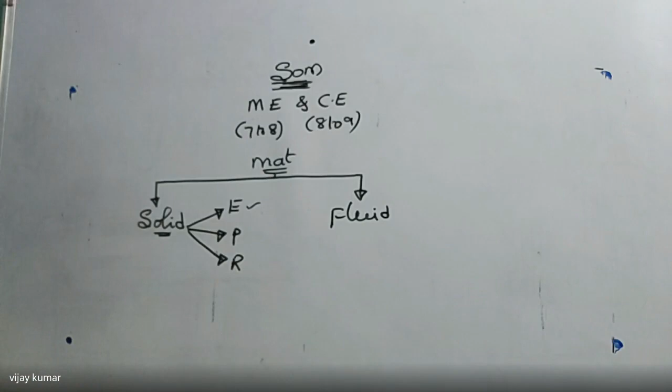In case of elastic material, all of you know the definition very well. What forces act on the material I'll give you later. If you apply any type of force, the material undergoes some expansion or deformation or change in shape or change in dimension. If you remove the external force, the body regains its original dimension or original shape. Such materials are named elastic materials. Most of the students will know this very well.

What is plastic material? If you remove the external force, the body does not regain its original dimensions or original position. Such material is named plastic material. Now, what is a rigid material? If you apply any type of force, the body does not have any change in shape, so there is no change in dimension of the material. Such material is named rigid material.

These are the materials we use in strength of material, but here we are going to learn only two variables. Listen carefully. The first one is sigma and the second one is epsilon. Sigma is nothing but stress and epsilon is nothing but strain. In the entire strength of material, we are going to learn the value of stress, whether it is maximum or minimum.

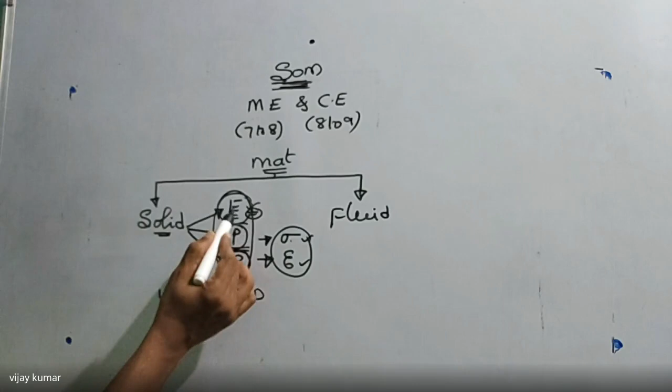So if it follows Hooke's law, then we can write the relation between stress and strain, whether it is one-dimensional, two-dimensional, or three-dimensional state of stress. Now, these are the materials we are using in our strength of material. Now, what are the forces which are acting on these materials? Listen carefully. Those are very, very important here. How many variables we have to calculate here? Two variables. One is stress and one is strain value.

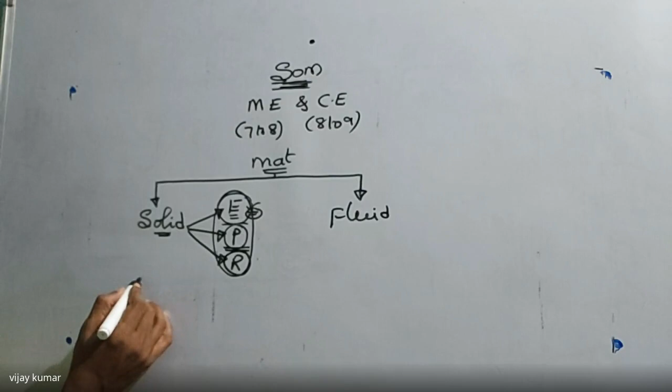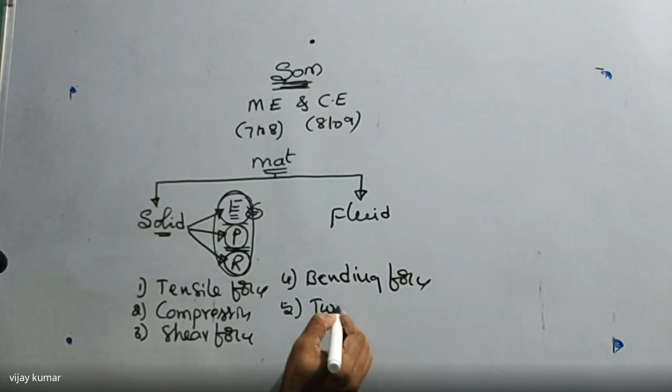And here, what are the forces acting on these materials? First one is nothing but tensile force, the second one is named as compressive force, third one is named as shear force, the fourth one is named as bending force, and fifth one is named as twisting force. So these are the forces which are going to act on different types of materials.

What are the materials here? Elastic, plastic, rigid materials. But which material are we using most in the engineering field? Elastic material. Why? Because it follows Hooke's law. Then we can write the relation between the stress and strain. Listen carefully. These are the forces we are going to apply on any type of material. When the material is said to be deformed, then we can find what is the value of strain. After that, we are going to find what is the value of stress.

Now, in case of fluid here, what are the values we are going to find? Only three variables. Listen carefully here. First one is nothing but pressure, and the second one is nothing but velocity, and third one is nothing but force. What is force? Force is nothing but M into A. What is acceleration? Acceleration is nothing but change in velocity with respect to time.

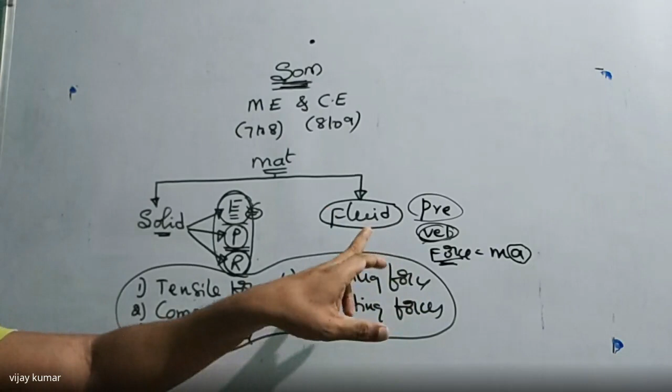If you know the pressure, I can find the velocity. If you know the velocity, I can find the acceleration. If you know the acceleration, I can find the force. If you know the force, I can find the work. If you know the work, I can find the power. If you know the power, I can find the efficiency. So this is the sequence of operation of different types of variables in our fluid mechanics. But in case of fluid mechanics, we are going to calculate only three variables: pressure, velocity, and force.

But in case of solids, we are calculating only two values. I already told you, that is sigma and epsilon, that is stress and strain, under tensile, under compressive, under shear, under bending, under twisting. Whatever the force you take on the material, we are going to calculate tensile stress, compressive stress, shear stress, bending stress, twisting. That is also named as torsional shear stress.

Got my point? So these are the different types of materials we are going to use from a civil and mechanical point of view. These are the types of forces which are acting on the materials. So now I'm going to give it to you here: what is the meaning of strength of material? That is the basic thing we are going to learn here. So listen carefully here. So first of all, I'm going to give you one thing.

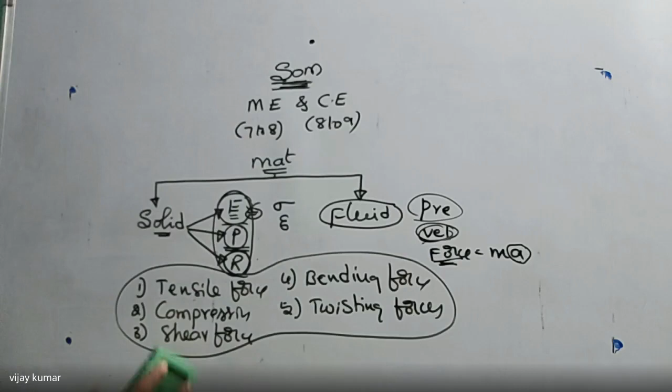Listen carefully. Depending on the forces, I'm going to divide the entire strength of materials into chapters. So listen carefully what I am saying now. Depending on these forces, the entire strength of materials is going to be divided into a number of chapters. So what are the chapters we have in our strength of materials? I'm going to give them to you, and after that, I'm going to tell you how many marks each chapter contains from the GATE point of view also.

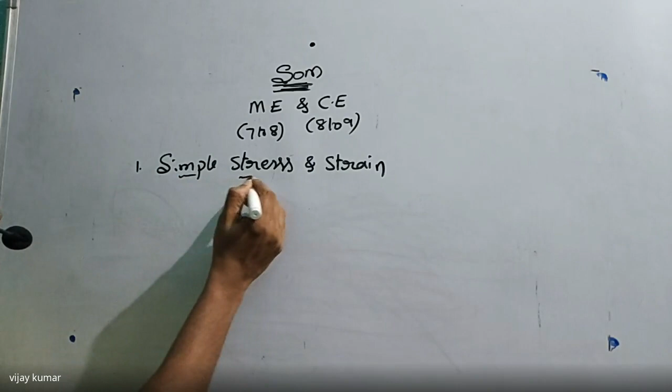The first chapter, all of you know very well, is nothing but simple stresses and strains. So why are we calling it simple stresses and strains? In this chapter, we are going to discuss only two values. I have already told you, if you take any chapter, we have to find only two values: what is the value of stress, and what is the value of strain. But in the case of simple stresses and strains, we find the value of stress and strain under only two forces, that is, tensile or compressive forces.

Here I am going to consider tension and compression forces, when the component is subjected to either a tensile force or a compressive force. Now, how to indicate a tensile force on the component? So this is the component. If you indicate the force like this, this force is always away from the body. This force is always named as tensile force. It is always positive.

So when this component is subjected to a tensile force, the body undergoes deformation. During the deformation, its dimensions will change. If the dimensions change, there must be a strain. So first of all, find the strain. After that, we have to find the stress value.

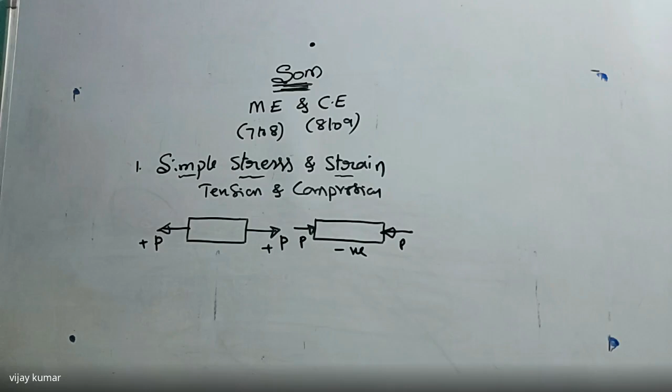Now, how to indicate the compressive force? This is the component. This force is always towards the component, or towards the body. Such a force is named as compressive force. It is always negative. Why? Because dimensions will reduce in the direction of action of the force. So these are the two forces we are going to consider in this chapter. By the application of these forces, I'm going to find tensile stress, compressive stress, tensile strain, and compressive strain.

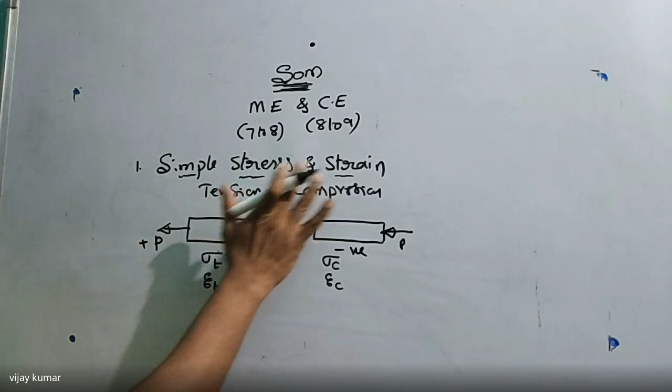I have already told you, listen carefully now. In every chapter, we are going to calculate only two values, that is, the value of stress and strain. After that, we have to write the relation between stress and strain also. When the component is subjected to uniaxial, biaxial, or triaxial loading, whatever it is, I can write the relation between stress and strain by using Hooke's law. So in simple stresses and strains, we consider only tension and compression, and by their application we find two types of values: stress and strain, under either tensile or compressive force.

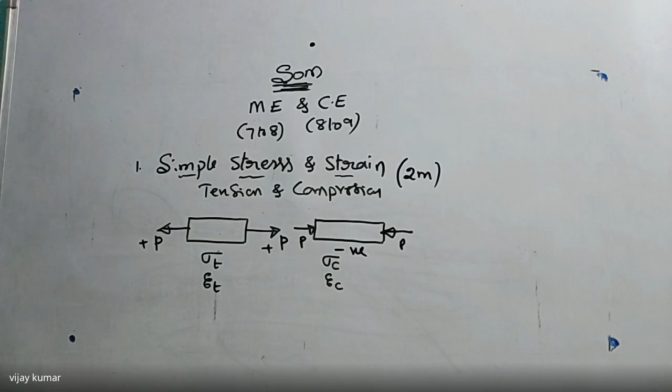One chapter is clear. From this chapter, you will get exactly 2 marks. Exactly 2 marks. And under this chapter we have subtopics. I will give the explanation of what the subtopics in simple stress and strain are, and which topics are important from the GATE point of view, so we have to concentrate. I will explain that later. So this is chapter number 1. In chapter number 1, we consider only two types of forces, tensile force and compressive force. So how many forces can we apply on the component? Five types of forces: tensile, compressive, shear, bending, and twisting.

So listen carefully. For chapter number 2, I am writing here complex stresses. Complex stresses, or principal stresses. Principal stresses and strains, or we can write complex stresses. What is the meaning of complex stress? When a component is subjected to more than one stress. More than one stress. That's why I told you.

That's why I told you uniaxial state of stress, biaxial state of stress, triaxial state of stress. There are different types of state of stress.

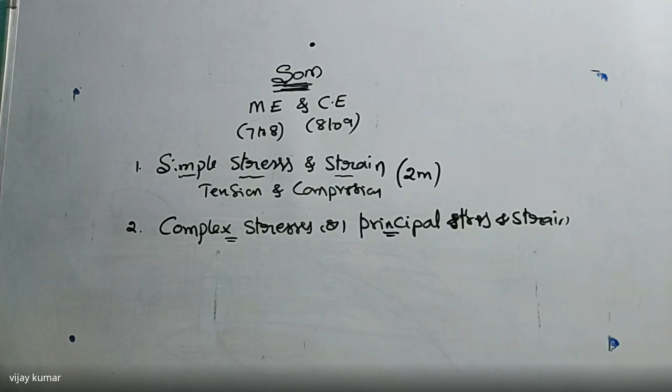But when a component is subject to more than one stress, that is named complex state of stress. So what is the meaning of principal stresses and strain? Principal means among all the stresses, one is maximum, one is minimum. But according to the maximum stress only, the component goes to fail. We are going to design the component without failure, so it must not fail under maximum stress. So I want to find what is the value of maximum stress.

For example, take a shaft. When the shaft is subject to tensile force, when it is subject to bending force, when it is subject to twisting force - how many forces are acting on the shaft now? There are 3 types of forces acting on the shaft.

But due to which force does the component go to fail? I want to find that value now. If you know that value, I can design the component more than or equal to that value, then the component never goes to fail. That's why we study complex state of stresses or principal stresses and strains. In this chapter, we are going to consider all forces.

We are going to consider all forces. This chapter will also give you 2 marks. Very, very important chapter - we have to take care about this one.

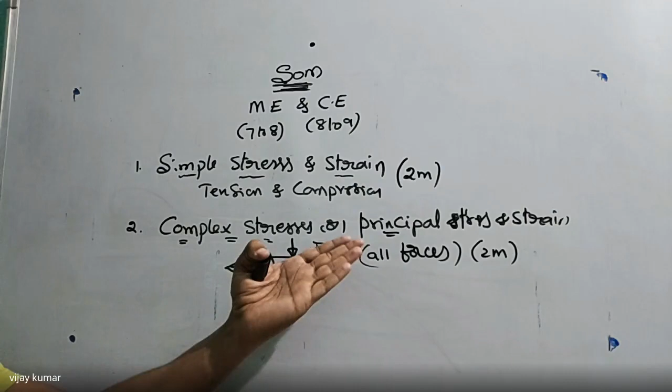In this case, we are going to find the principal stresses and strains according to two methods. One is the analytical method, one is the graphical method. In the graphical method, we know very well that it is also named as Mohr's circle diagram or Mohr's method.

So in the complex state of stress or principal stresses and strains, we are going to consider all forces - tensile force, compressive force, bending force, twisting force, and shear force, whatever you take. We have to consider all forces.

Now here is the third chapter I'm going to give you - shear force and bending moment diagrams. Here we are going to find where the shear force is maximum, where the bending moment is maximum.

Why are we going to draw the shear force diagram and bending moment diagram? By seeing the diagram, we can easily identify where the shear force is maximum and where the bending moment is maximum. If you know where the shear is maximum, at that point automatically the component goes to fail. Where the bending is maximum, at that point the component also goes to fail.

So I'm going to increase the strength of the material at that point where the shear is maximum, where the bending is maximum. I'll explain later how to increase the strength of the material at the failure point.

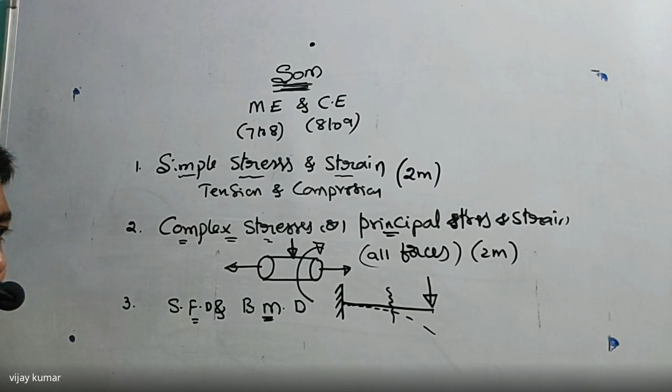So here we are going to find the shear force due to this failure, and find the moment due to this failure. I'm going to find what is the value of maximum shear and what is the value of maximum bending moment when these beams are subject to vertical or normal loads.

This normal load is nothing but vertical load here, named bending load. Due to this bending load, we are going to find where the shear is maximum and where the bending moment is maximum. So we have to remember one thing.

In this chapter, we are going to consider only bending force, or we can assume it as the normal force which is perpendicular to the axis of the body. That's why it is named normal force - it is also said to be bending force here.

Here also we get sometimes 2 marks or sometimes 1 mark. So listen carefully - this is the basic chapter, simple stress and strain, how to calculate stresses. In this chapter, we have to calculate stress and strain under tension and compression.

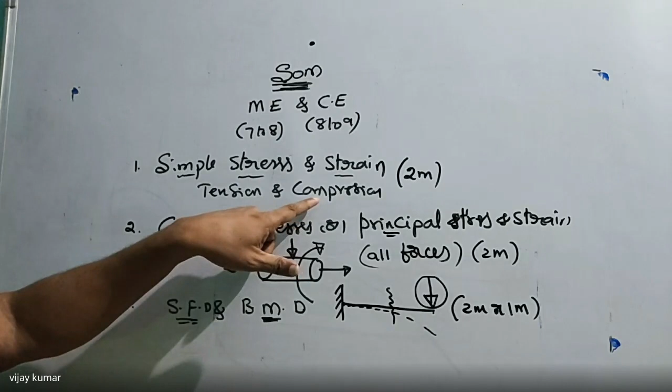And here, this is the complex state of stress and the principal strain. Here, we consider all forces. And this one is also very, very important.

So you have to draw the shear force diagram and bending moment diagram very easily. There is no difficulty to draw the shear force and bending moment diagram. Very easily we can draw it. So that's why, from gate point of view, they will ask sometimes for 1 mark and sometimes for 2 marks also. But this one is almost always 2 marks. So listen carefully now. All right.

So this is our chapter number 3. Chapter number 4 is nothing but bending stresses in beams. Bending stresses in beams. What is the bending stress in beams here? Why are we naming it bending stress in beams?

When the beam is subject to any type of force, whether it is tension or compression or whatever it is, if you take at any point on the beam, there must be two types of stresses. One is said to be normal, one is said to be shear. Sometimes normal is maximum, shear is minimum. Listen carefully what I am saying now. For example, I am taking this component which is subject to some force.

So here, like tensile force, listen carefully. I am taking one point on this component. So what I am saying here, at that component, there must be two types of stresses. One is normal to the surface, one is parallel to the surface. But in some cases, the normal stresses are maximum. In some cases, shear stresses are maximum.

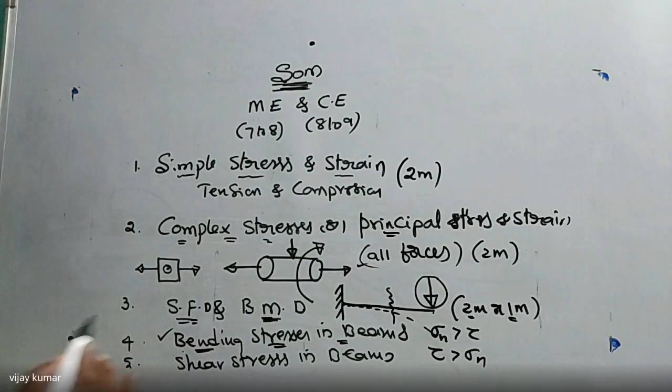I want to find which stress is maximum at that given point along the length of the beam. I want to find it. So in bending stresses, we are going to consider bending force. So in shear stresses, we are going to consider shear force. What is the meaning of shear force? It is always parallel to the surface. All of you know very well now. Or you got it? Right.

So here, these are the 5 chapters. This chapter, shear stress in beams, is very, very important from a civil point of view. And bending stresses in beams is important for both civil and mechanical. You will get exactly 1 mark here. Exactly 1 mark here. Or you got it? All right. So these are the 5 chapters: simple stresses, complex stresses, shear force and bending moment diagram, bending stress, and shear stresses.

Here in bending stresses in beams, we have to find what is the value of maximum bending stress. In shear stress in beams, we have to find what is the maximum shear stress and maximum shear strain also, and also maximum bending strain. So what I told you at the start of the class, you have to find only two types of values: one is said to be stress, one is said to be strain. Are you clear about this one?

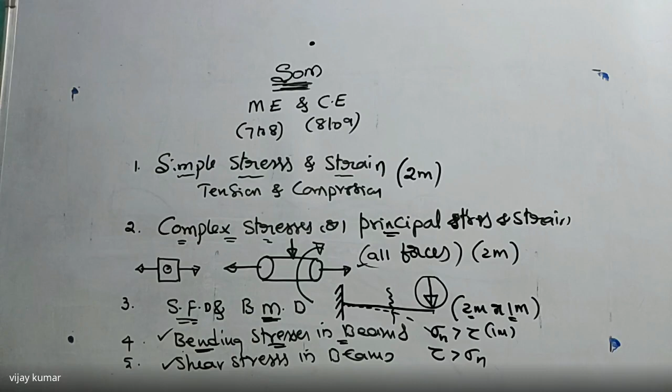So these are the 5 chapters. I'm going to give the remaining chapters also here now. That is, the next one is nothing but torsion of shafts. Torsion of shafts.

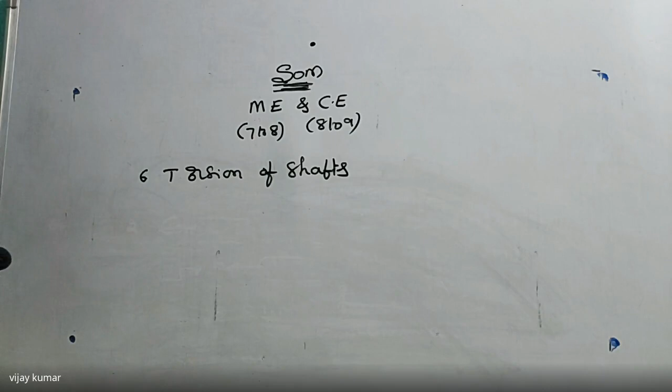So this is also a very, very important chapter from civil and mechanical point of view. So here we are also getting 2 marks here. 2 marks here. So listen carefully. At the end of these chapters, I'll tell you what are the most important chapters from the gate point of view we have to prepare now. So in torsion of shafts, we are going to consider only twisting force. That is always parallel to the surface.

So this is the twisting force. This is the shaft, which is subject to twisting force, equal and opposite. Then the shaft will rotate either clockwise or anti-clockwise direction. Then we can find the torque value. Torque or torsional twisting moment, all are the same.

So in this case also, we are going to find what is the maximum torque acting on the shaft or on any component. We have to find it depending on the forces acting on this component. So in this chapter also, we are going to find what is the maximum torque or maximum power transmitted by the shaft and what is the maximum shear stress in the shaft. This is chapter number 6.

And chapter number 7, deflection of beams. This one is very, very important chapter in case of both civil and mechanical point of view, but especially in case of civil point of view, very, very important. So we take this one is also 2 marks. You will get it in the gate examination. In deflection of beams, here we have slope and deflection.

It is named as slope and deflection of beams. So if you take a beam like this, which is said to be a cantilever beam, and if you take one point on the beam like that, A, and apply some force which is perpendicular to the axis of the beam, then the beam automatically will bend like this, and the point is also displaced from this point to this point. So this is the displacement of this point. The displacement is nothing but y.

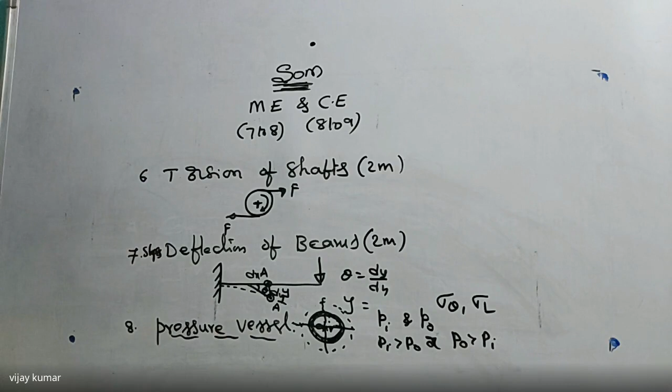So we are getting two types of stresses. I hope all of you know very well those stresses. What are the stresses? One is said to be hoop stress, one is said to be longitudinal stress. So we are going to find when the hoop stress is maximum, when the longitudinal stress is maximum. But among these two, which one is maximum, which one is minimum? We are going to calculate in pressure vessels.

But the simple definition is: inside pressure is more than outside pressure, or outside pressure is more than inside pressure. Such a type of vessel is always named as pressure vessel. So the pressure vessel is also defined in another way, there is no doubt, that is depending on t by D ratio. I'll give it to you in the chapter what is t by D ratio.

Depending on the D by d ratio also, we can classify which type of pressure vessel it is, whether it is a thick pressure vessel or thin pressure vessel, we can classify it so easily. Have you got it? So from this chapter, we will get only 1 mark. So listen carefully. You get 1 mark. So it is very simple.

So we have to remember only two formulae. That is, what is the formula for hoop stress? What is the formula for longitudinal stress? They will ask the question, find the maximum stress in the cylindrical vessel or spherical vessel. They will give it to you. Then we can find which stress is maximum automatically. We can find it very easily.

Right. So these are the chapters torsion of shafts, slope and deflection of beams, and this is the pressure vessel. Here 8 chapters are over. And the 9th chapter, all of you know, is nothing but columns and struts. Column and strut. So in this column and strut, for example, if you take a column, that is said to be a vertical column, it is like a vertical cantilever beam.

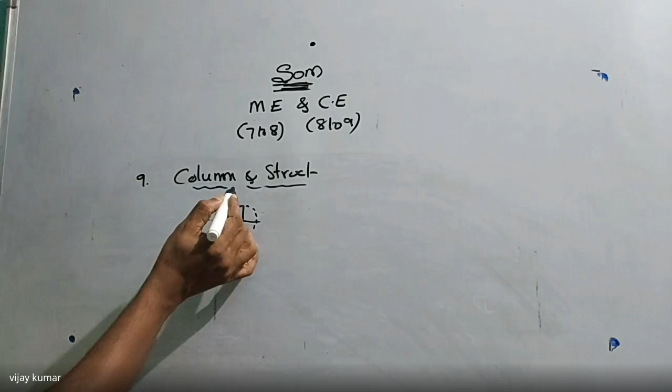So, you got it? In this case also, we are going to consider the compressive force, whether it is acting exactly at the center or away from the center. If it is exactly at the center, it is named as an axially loaded column. If it is away from the center, it is named as an eccentrically loaded column. In this chapter I'll give you the definitions of column and strut, and the difference between strut and column.

From this one, we'll also get one mark from the GATE point of view. Not more than 1 mark. So you have to concentrate on this chapter very less. And the next one, the 10th one, is strain energy. Strain energy is a very important chapter. They will ask questions like, find the slope and deflection according to the strain energy method. So we have to learn about strain energy.

What is the meaning of strain energy? What is the meaning of strain here? If you apply any type of force on a component, the component undergoes some deformation, then it is said to be under strain. When the component is under deformation, it has some energy during the deformation. You get my point?

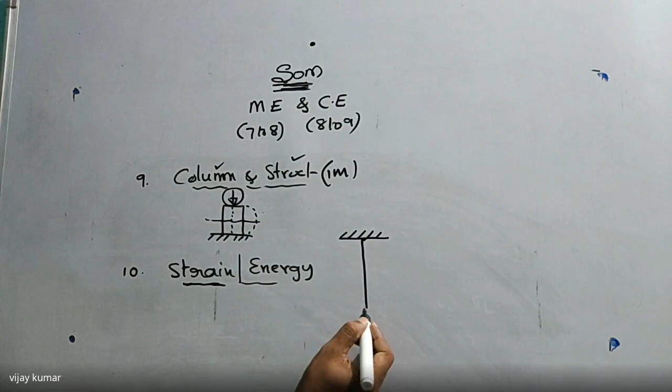So listen carefully. For example, I am taking a small elastic wire which is fixed at one end, and the other end is free. I'm going to add some small weight at the other end. Due to the small weight, the elastic wire will extend from this point to this point. This is named as extension or deformation of the elastic wire, delta L, and the length of the wire is L. Now the weight of the ball is P, the force, which we can also write as weight W. You got my point or not?

So here what I am saying is, when the ball moves from this point, it undergoes some displacement. But here the displacement is also named as deformation of the string or wire. Did you get my point? So there must be some work done by this force on the wire. During the deformation, there must be some work done. What is the work done here?

Work done is nothing but force into displacement. What is the force here? P. What is the displacement here? Deformation, delta L. So P into delta L is nothing but work done. Work done is one form of energy. That energy is stored in this wire during the deformation, or during the strain condition. That's why it is named as strain energy. Did you get my point? Energy stored in the material during the deformation is said to be strain energy.

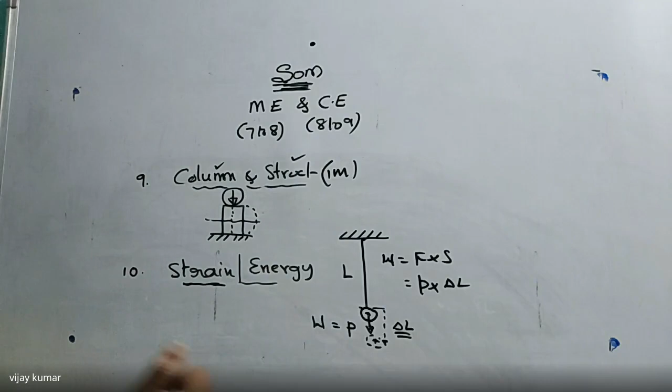What is strain energy? Strain energy is nothing but energy stored in a material during deformation. What is happening during the deformation? The material undergoes some extension of the length, which is also a displacement. So there must be work done by the force on this wire in this example. Work is equal to force into displacement. Force is the weight of this ball, that is P, and the extension of this wire is delta L, that is displacement. So P into delta L is the energy stored in the wire. That energy is named as strain energy.

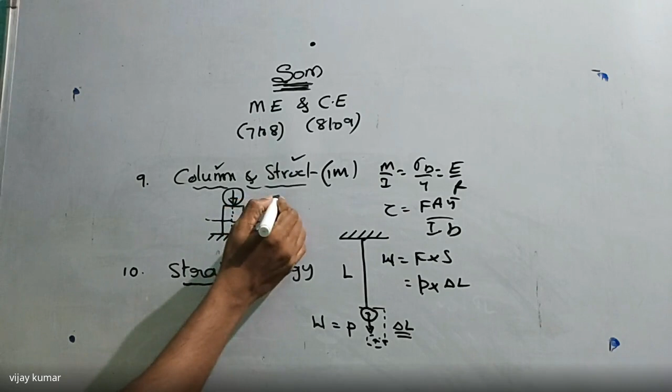In bending stress in beams, we can use this formula: M by I is equal to sigma B by Y is equal to E by R. In case of shear stresses, we can use tau is equal to F into A into Y bar divided by I into B. So in every chapter, we use only one formula to find the maximum shear or maximum bending stress. And in columns and struts also, we are calculating only the critical load, Pc, under eccentric load or axial load, according to different methods I will give you.

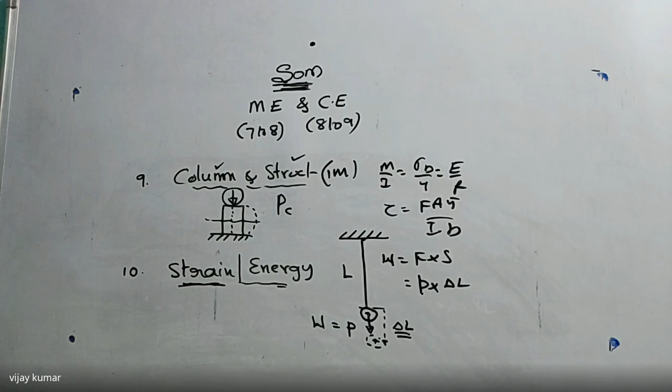In case of strain energy, we find the energy stored in the material during deformation in different cases, under tension, compression, bending, and shearing. We can take any case and find the strain energy very easily. So which chapters are very important from the GATE point of view? Concentrate more on chapter 1 and chapter 2, simple stress and strain and complex state of stresses or principal stresses and strains, and torsion of shafts and deflection of beams. After that, shear force and bending moment. The remaining things are very easy, so put less concentration on them. So this is the analysis of your strength of materials: the chapters and which carry marks from the GATE point of view.

So maximum marks we will get 7 to 8 or 8 to 9 according to the civil and mechanical point of view. So all of you clear about this one now, first of all. So if you get 8 marks from strength of material, at the same time from fluid mechanics also you will get 10 to 11 or 8 to 10 marks from civil and mechanical point of view. So if you prepare thoroughly these two subjects, you will get 18 to 20 marks like that.

Okay, so take care about those two subjects. You will get exactly 20 marks, otherwise 19 marks. If you prepare mathematics, approximately you will have 25 marks. Then you will exactly qualify in GATE examination. If you prepare further more core subjects, then you will get a good rank in GATE examination. So keep these points in your mind. So take care about the chapter.

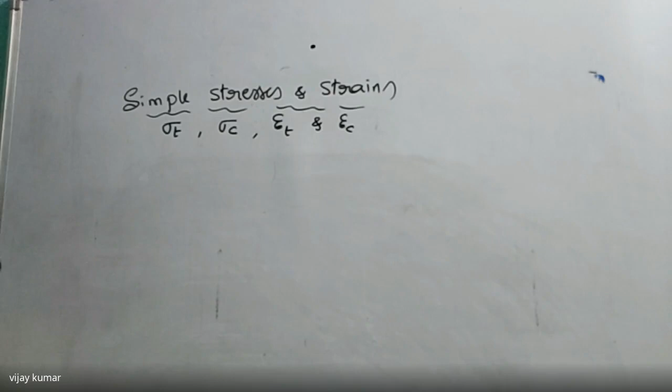Listen carefully. So before going to learn about this chapter, simple stresses and strains, I want to tell you the meaning of SOM, that is strength of material. So, for example, if you take a material, this material is composed of molecules. These are the molecules which are very close to each other. These are the particles which are closer to each other.

So between the particles, which force exists? They are in contact with each other. So these two particles are same or different? These two particles are same. So there must be one force existing between the same particles. That is named as cohesive forces. When the cohesive forces increase, the strength of this material is also increased. That means the material is said to be hard material. You got my point?

So can you reduce the force of attraction between the particles? Yes, I can reduce the force of attraction between the particles. How? If you heat it, if you supply some quantity of heat energy. The force of attraction between the particles is named as internal force. That internal force is named as cohesive force. Now, this material having internal force, that is also named as R. R is named as internal force of the material.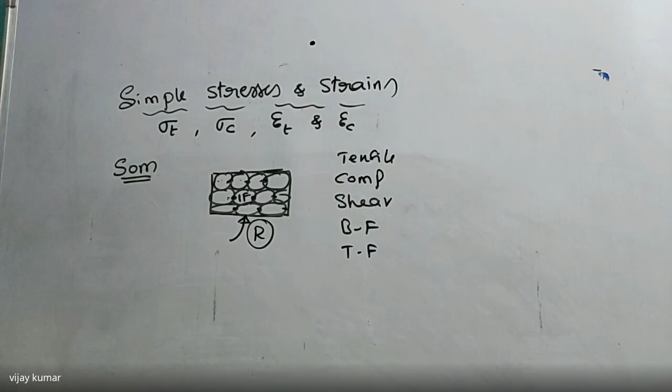Now I'm going to apply external force on this material. What are the external forces we are going to apply here? I have already told you. One is tensile force. Second one is compressive force. Third one is shear force. Fourth one is bending force. And last one is twisting force. So these are the forces I can apply on this material. For example, I'm going to apply tensile force on this material. This is internal or external? This is external force.

This is internal force. So in the case of solids, internal force is due to which one? Cohesive forces. Listen carefully. When the cohesive forces are very, very less, that becomes a gas. In case of gases, what is the force of attraction between the molecules? Very, very less. In case of liquids, cohesive forces are more than gases. In case of solids, cohesive forces are very, very greater than liquids and gases. So in the case of solids, cohesive forces are more. So these are nothing but solids.

So here, these solids are having internal force and we are applying some external force. What I am saying here, when the external force is equal to internal force, now tell me, is there any deformation of the material? No, there is no deformation of the material. We get deformation of the material when P is greater than R, that is, external force is more than the internal resisting force; then the material undergoes deformation.

After that, we are finding the change in dimensions. After that, we are finding the strain value. After that, we are going to find the stress value. After that, we are going to write the relation between the stress and the strain value according to Hooke's law in one-dimensional, two-dimensional, and three-dimensional state of stress. Are you got it? Now here, if you take any material, that material must be having some internal force.

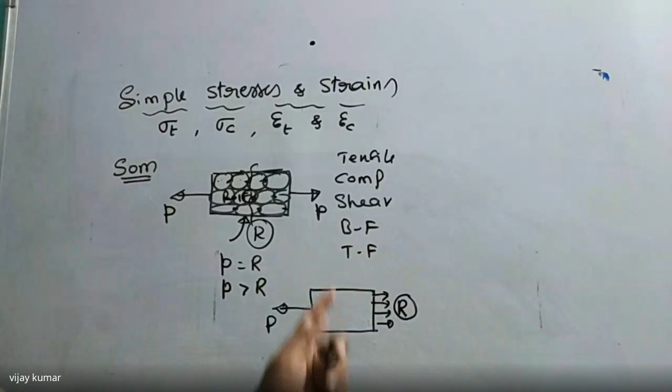Right, listen carefully. So what is strength of material? It is the internal resistance force offered by the body against the deformation within the elastic limit. Within the elastic limit means up to a certain limit it always opposes the deformation. That limit is named as elastic limit. You got my point?

If you increase the external force, at a particular force the body starts to deform. That has some limit. So there must be a limit. That limit is nothing but elastic limit. That limit is named as its strength. You got my point? Listen carefully, once again I'll give you the definition. It is defined as the internal resistance force offered by the body against the deformation within elastic limit. That limit is named as its strength of material.

For example, my body carries approximately 60 or 70 kg. 70, for example, is my limit of carrying weight. So if you put more than 70, my body undergoes some changes. That is said to be under strain. After that, we can find the stress value. So that is a very simple example I have given to you. So this is the definition of strength of material.

You got it? So the strength always depends on which forces? Cohesive forces. When the cohesive forces are less, strength is also less. When the cohesive forces are more, strength is also more. What is the definition of strength of material? Internal resistance force offered by the body.

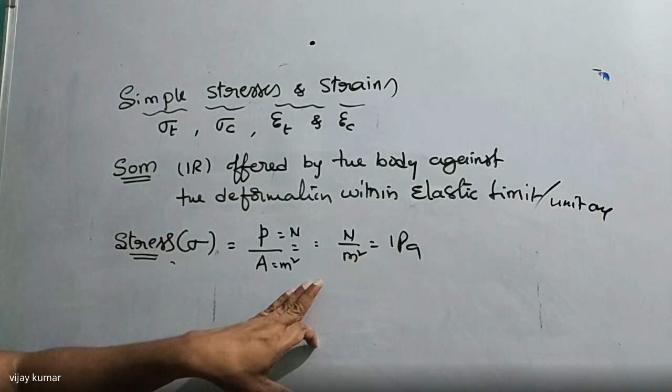Listen carefully here. What is the definition of stress here? The definition is the same; at the end of the definition we can write per unit area of cross section. So internal resistance force offered by the body against the deformation within the elastic limit per unit area of cross section, that is named as stress. You got it? So what are the units of stress here?

Stress is always measured in Pascal, kilopascal, megapascal, and gigapascal. 1 Pascal is equal to 1 Newton per meter square. 1 kilopascal is equal to 10 to the power of 3 pascals. 1 megapascal is equal to 10 to the power of 6 pascals. 1 gigapascal is equal to 10 to the power of 9 pascals. So if you are a civil or mechanical engineer, you can easily identify the units of stress.

Now, what are the types of stresses we are going to calculate here? We are going to calculate only two types of stress: tensile stress and compressive stress. But here, types of stresses. Generally, stresses are two types. One is said to be normal stress. One is said to be shear stress.

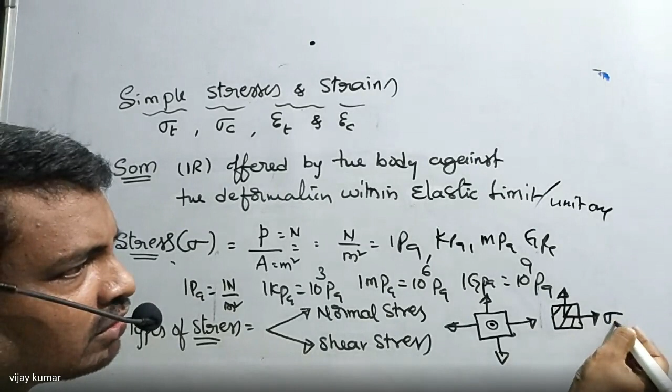For example, if you take this as the plane, one is perpendicular to the plane, one is parallel to the plane. Perpendicular to the plane is nothing but normal stress, and parallel to the plane is nothing but shear stress. So two types of stresses will exist: one is normal stress, one is shear stress.

But among the two stresses, in some cases one of the stresses is maximum and one is minimum. Sometimes shear is maximum, normal is minimum. Sometimes normal is maximum, shear is minimum. So we have two types of stresses here: normal stress and shear stress.

In normal stresses, tensile stress is normal stress, compressive stress is also normal stress, and bending stress is also normal stress. Why? Because these three types of stresses are perpendicular to the cross section of the component. So those are always named as normal stresses.

Tau is nothing but shear stresses. Under pure shear, under torsional shear also, we are getting two types of shear. So this is the definition of stress, and these are the types of stresses, which we know. These are the units of stresses, which all of you know.

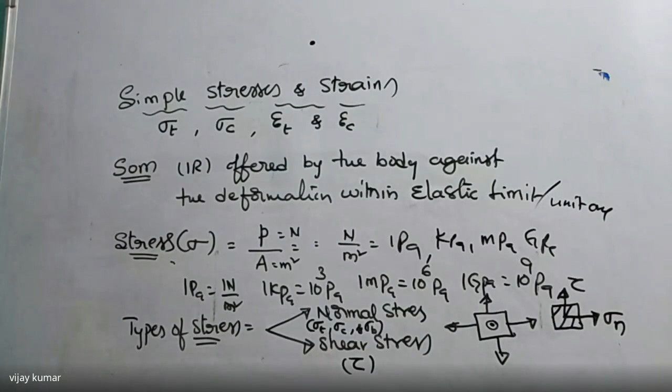Then I'm going to move to strain after stress. We know very well the definition of strain, but I'm going to explain what is the value of strain here. Listen carefully, after that I'm going to give the relation between stress and strain. So listen carefully.

So here I'm going to write what is the value of strain and what is the definition of strain. Some textbooks indicate it as epsilon, sometimes by symbol E. These are the symbols of strain value, which all of you know. What is the definition of strain here?

Strain is always defined when the component is said to be under deformation. When the component is under deformation, the deformation will take place lengthwise, widthwise, thicknesswise, and also diameterwise.

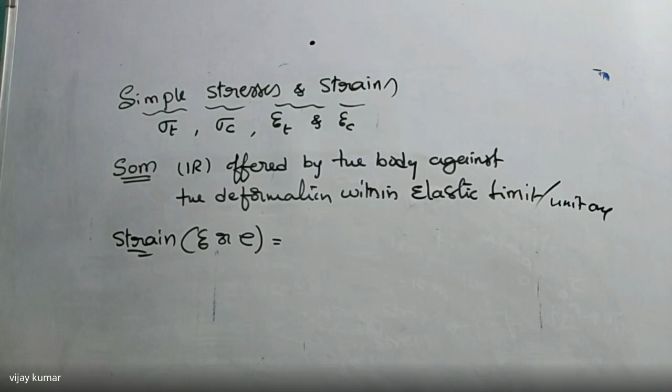So here, strain is defined as the ratio of change in dimension to original dimension. We are having different types of dimensions for different types of components.

For example, take this rectangular component. How many dimensions does it contain? Three dimensions: length, width, and thickness. Now take another component, a cylindrical component. How many dimensions does the cylindrical component contain? Length and diameter.

And now take this spherical component, a ball, a sphere. How many dimensions does this one contain? Only diameter. So here we have one dimensional, two dimensional, three dimensional: the sphere has only diameter, the cylinder has length and diameter, and the rectangular component has length, width, and thickness.

So strain occurs along four directions: lengthwise, widthwise, thicknesswise, and diameterwise. So we get strain along length, strain along width, strain along thickness, and strain along diameter. All of you get it?

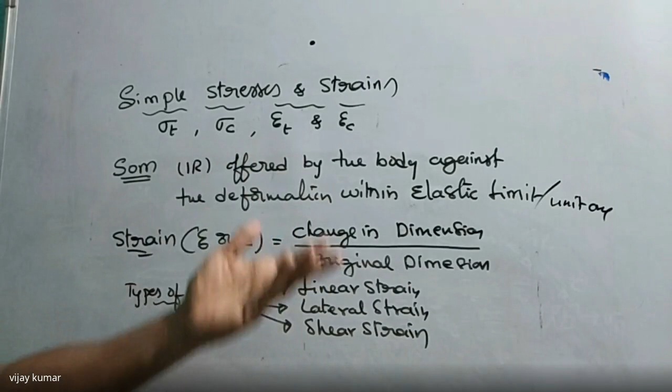Types of strains: strains are of three types. One is linear strain, so we can take along length as linear with the rest being lateral, or width as linear with the rest being lateral. We can take any one as linear and the remaining all are lateral. So: linear, lateral, and the last one is shear strain.

What is shear strain here? Listen carefully. For example, if you take a component which is fixed at one end, this point is A, this point is B. I'm going to apply some force like this, which is parallel to the surface of the component, and the support will also give some reactive force, against the applied force. Both are having same magnitude, but directions are opposite, so that this component will deform like this. So this deformation I'm going to indicate as phi.

So that is angular displacement here of the point A to A dash, or we can take B to B dash also. This height of the component is nothing but L, or we can take height also. And this point is displaced from this point is nothing but I am going to take as delta L. This point is displaced after applying this force, which is parallel to surface. When the force is parallel to surface, that force is nothing but shear force. So here, this is the height of the component, and this is the displacement of the component.

So when you write the tan phi value, I am writing delta L by L. Delta L by L. So if this angle is very small, then phi is equal to delta L by L. So this phi is named as shear strain. Phi is named as shear strain. So are you got it?

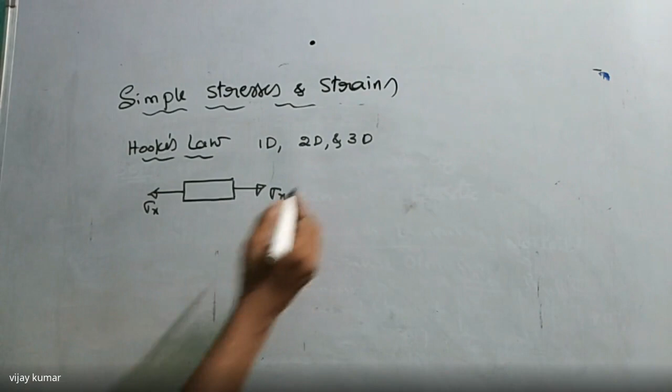If the component is like this, sigma x, sigma x, sigma y, sigma y. So this is the component having two-dimensional, having two normal stresses along x and along y. It is named as two-dimensional state of stress. And the third one automatically we can write it here.

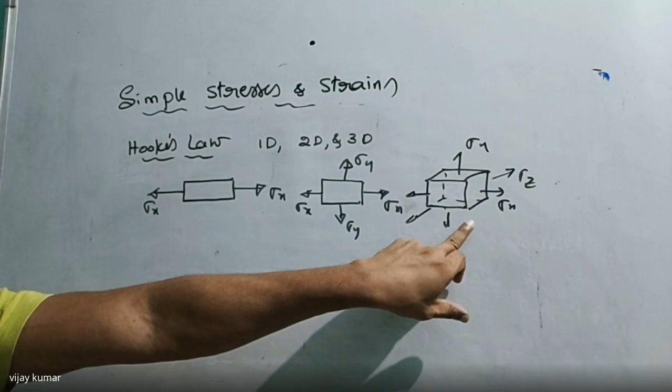So this is the component. We are having x direction, y direction, z direction, sigma x, sigma y, and sigma z. So this is named as three-dimensional state of stress. Now, whether it is a rectangular component or a cylindrical component or any type of shape, whatever it is, I'm going to apply force in one direction, here in two directions, here in three directions. That's why it is named as one-dimensional, two-dimensional, three-dimensional state of stress.

So here, what does Hooke's law say? When the material is said to be elastic material, stress is always directly proportional to strain within the elastic limit. Are you got it? So listen carefully. When the material is said to be elastic material, I am writing here, stress is directly proportional to strain within elastic limit.

Within elastic limit, listen carefully here: stress is directly proportional to strain within elastic limit. This is not valid for all components or all types of materials. If you take 100 types of materials, only a few accept this Hooke's law within the elastic limit, but most materials accept Hooke's law in the proportional limit. But there is no big difference between the proportional point and the elastic point.

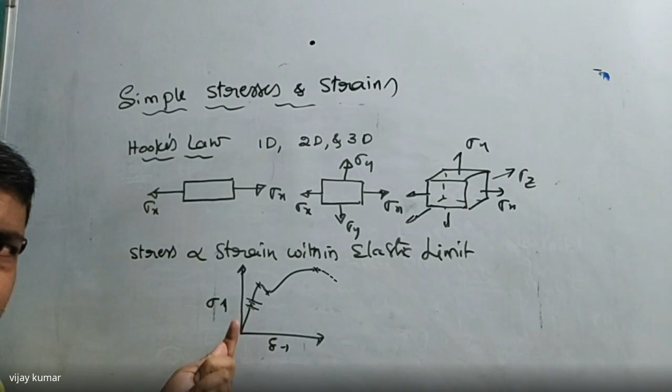So this is the proportional point, this is the elastic point. Both are very close to each other, very very close to each other, so we are going to neglect the difference between these two points, because those two points are very very close to each other. So I'm going to say stress is directly proportional to strain within the elastic limit.

Why am I saying elastic limit? Practically it's within the proportional limit, but here I'm saying elastic limit, because these two points are very very close to each other. So I am saying stress is directly proportional to strain within the elastic limit. Did you get it? So be very careful, observe the points I am saying. If you have any doubt, please ask me immediately, no doubt now.

So here, this is the proportional point, elastic point, upper yield point, lower yield point, ultimate point, break point. There are different types of points. I'll give the explanation very clearly in the further discussion, no doubt, so don't bother about those things now.

So here first of all I'm going to write: what is the relation between stress and strain in one-dimensional state of stress? This is under tension or compression. If you indicate the arrow mark like this, it is said to be under compression. If you indicate the arrow mark like this, it is said to be under tension. Along X or along Y, we can take any direction. Did you get my point?

So here, in one-dimensional state of stress, Hooke's law says when the material is elastic, stress is directly proportional to strain within the elastic limit. Stress is indicated by sigma and strain is indicated by epsilon. If you remove the proportionality constant, we put a constant, so stress equals E into epsilon. E is nothing but Young's modulus.

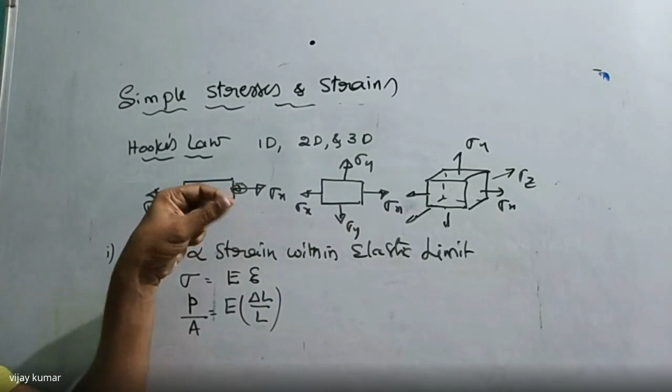Here also, when the component is subjected to tensile force, length will increase, width reduces, thickness also reduces. When we compare length, width and thickness, length will increase more compared to the decrease in width and thickness. So I'm going to neglect the remaining two dimensions and take the major dimension that changes more. That's why I'm taking delta L by L here. You got my point?

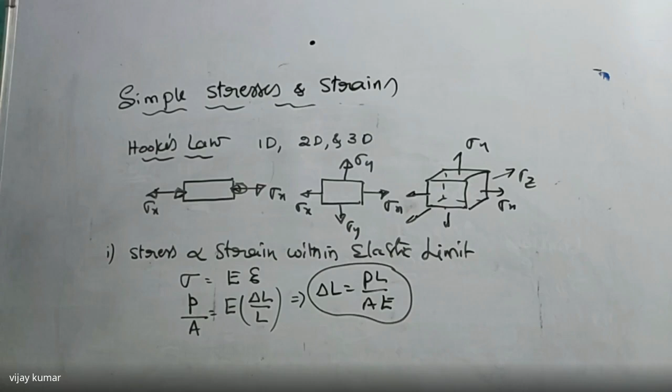So from this equation, I want to find delta L is equal to PL by AE. Now, what is the importance of this formula? By using this formula, we can calculate the increase or decrease in length of the component when it is subjected to either tensile force or compressive force in a one-dimensional state of stress. That is clear. Next, I want to show you how to calculate the stress and strain relation in a two-dimensional state of stress.

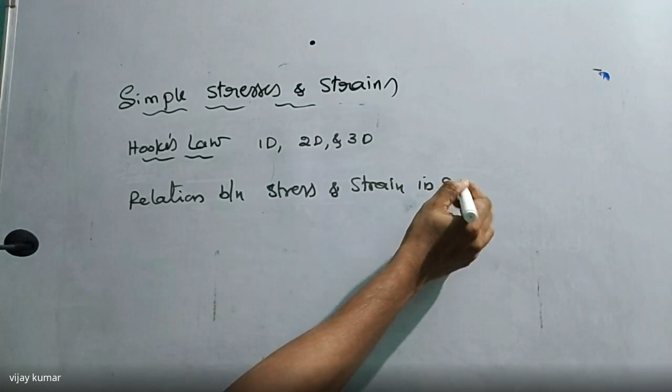Listen carefully. I'm writing here the relation between stress and strain in a two-dimensional state of stress. One-dimensional state of stress is very simple: stress is directly proportional to strain. But here it is two-dimensional, so it is said to be a plane. If it has three dimensions, it is said to be a solid. If you consider the thickness, it becomes a solid. If you neglect the thickness, it is said to be a plane.

So generally, in nature, how many planes do we have? Three planes: XY, YZ, ZX. If it is a plane, we have horizontal and vertical, so we have normal stress and shear stress. If you take any point on this plane, we have two types of stresses, normal stress and shear stress.

Now listen carefully. When the component is subjected to two stresses, sigma x and sigma y, in two directions like this, it is named a two-dimensional state of stress. Now I'm going to write the relation between stress and strain. Here we are getting epsilon x and epsilon y, stress and strain along x and y. You got it?

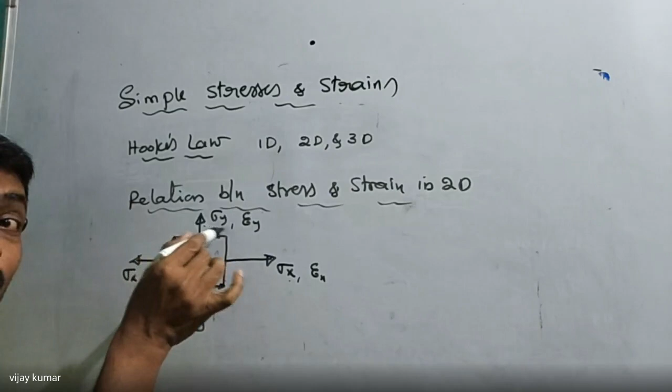If you apply the force along x, x is linear, y is lateral. If you apply the force along y, y is linear, x is lateral. Why? Because both are perpendicular to each other. I have already told you. So, first of all, we have to write the relation between the lateral strain and the linear strain so that we are getting one term. The term is named as Poisson ratio.

So by defining the Poisson ratio, then we are going to write the relation between the stress and strain in two-dimensional state of stress. Now, in some textbooks, the Poisson ratio is indicated by the symbol nu. In some cases, m, or 1 by m. In some cases, they are indicated as mu also. This is mu, this is nu. All are the symbols for Poisson ratio.

So what is the definition of Poisson ratio here? That is lateral strain divided by linear strain. Why are we going to write the Poisson ratio here? If you want to write the relation between stress and strain in two-dimensional; in case of one-dimensional state of stress, there is no need of Poisson ratio. But here, in two-dimensional state of stress, Poisson ratio is required. So Poisson ratio is lateral strain by linear strain.

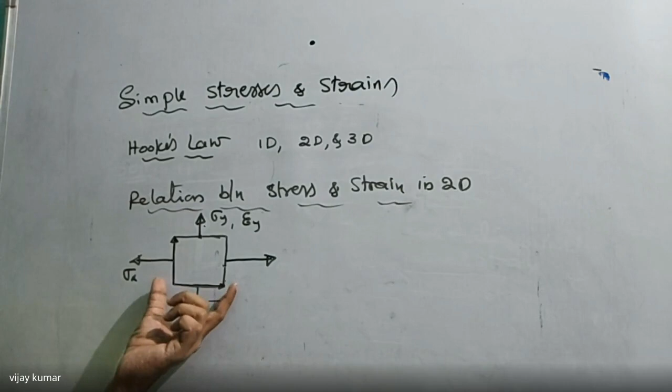If you apply the force along x direction, there must be a strain along x and a strain along y. What is the total strain here? Total strain along x is equal to linear strain along x direction plus lateral strain along y direction. If you apply the force along x direction, we have two types of strains: linear strain along x, lateral strain along y. Linear strain is epsilon x plus this one is epsilon y. This is lateral, this is linear.

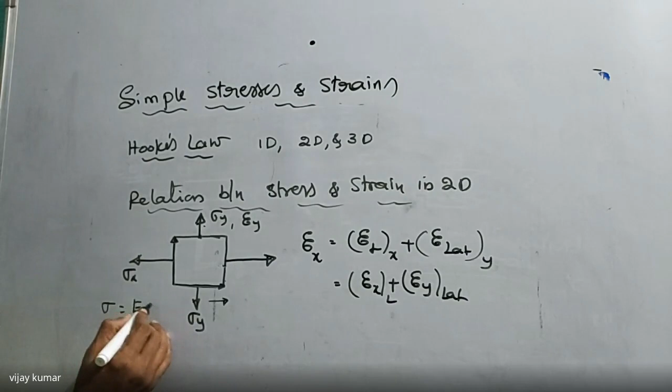But what is the relation between stress and strain in any one direction? Stress is always equal to E into strain, and strain is equal to sigma by E. Anybody have doubt, please ask me immediately. So here I am writing epsilon x is equal to sigma x by E. This is the linear strain along x direction. What is the lateral strain along y? Lateral strain is equal to minus Poisson ratio into epsilon y linear.

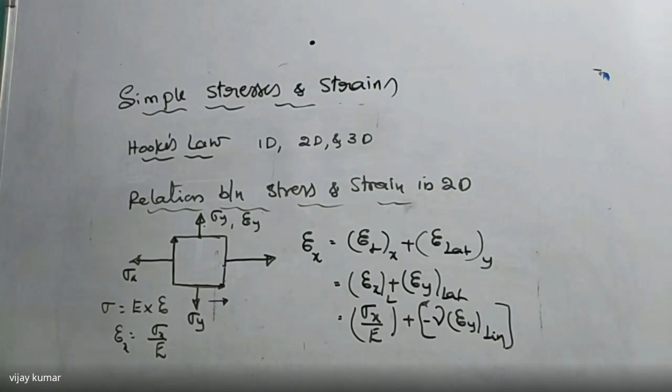I have given it in the previous formula. Already I told you. So here I am writing epsilon x is equal to sigma x by E minus Poisson ratio into sigma y by E. So that is the value of total strain along x direction. It is also named as the relation between stress and strain along x direction.

So in the same way we can also write for y direction. So what is the total strain along y direction? Epsilon y is equal to, here y is linear, x is lateral. So sigma y by E is linear minus Poisson ratio into sigma x by E is lateral. You got my point?

So here two strains we are getting. I'm getting strain along x and strain along y. It is also named as relation between stress and strain along x direction. So this is stress and strain relation along y direction. So by using the Poisson ratio, we can write the relation between the stress and strain along x and y direction in two-dimensional state of stress. You got it here now?

So anybody have doubt, please inform me. I'll clarify your doubts also. No problem, right? All right.

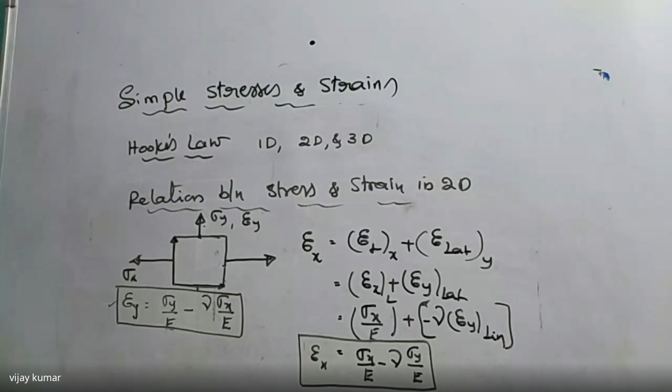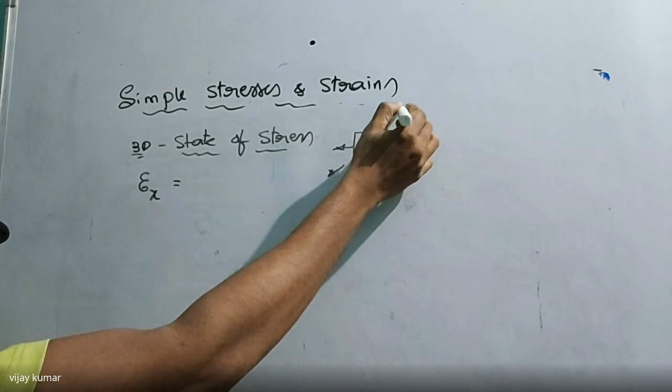So I'm going to write what is the relation between stress and strain in three-dimensional state of stress. Listen carefully. All right. So here, in case of three-dimensional state of stress, I'm writing directly. If you take total strain along x, for example, this is the component along x, along y, and along z. This is sigma x, sigma y, and this is sigma z.

Now tell me the formula. What is the total strain along x? X is linear, y and z are lateral. So I am writing sigma x by E minus Poisson ratio into sigma y by E minus Poisson ratio into sigma z by E. This is the total strain along x direction.

Same as, what is the total strain along y direction? Y is linear, remaining two are lateral. So sigma y by E minus Poisson ratio into sigma x by E minus Poisson ratio into sigma z by E. Alright, got it? I am going to write epsilon z here. What is epsilon z? Z is linear. That is sigma z by E minus Poisson ratio into sigma x by E minus Poisson ratio into sigma y by E.

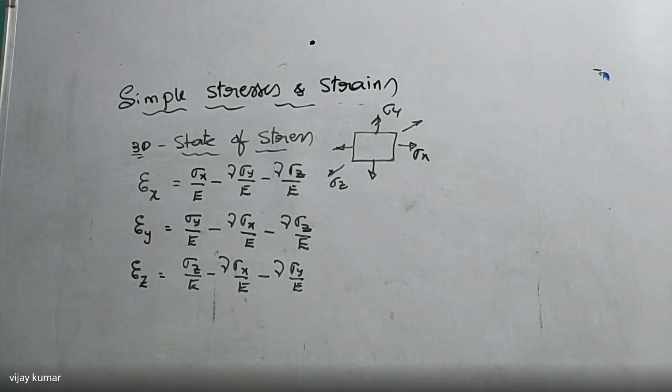So these are the values of strain and stress relation along x, y and z by using Poisson ratio. This is the relation between stress and strain in three dimensions. Then I want to find the volumetric strain. That is, what is the total strain here? Total strain is nothing but epsilon x plus epsilon y plus epsilon z. It is also named as volumetric strain, equal to epsilon x plus epsilon y plus epsilon z.

If you add all these values, you will get one relation. That is epsilon v is equal to, so add these three now. That is sigma x plus sigma y plus sigma z divided by E minus, you will get two terms of x, two terms of y, two terms of z in terms of Poisson ratio. So 2 Poisson ratio into sigma x plus sigma y plus sigma z by E. Taking the common term, that is sigma x plus sigma y plus sigma z divided by E into 1 minus 2 nu.

So this is the value of volumetric strain when the component is subject to three mutually perpendicular stresses. Got it? In examination point of view, they will ask different types of questions on this one also.

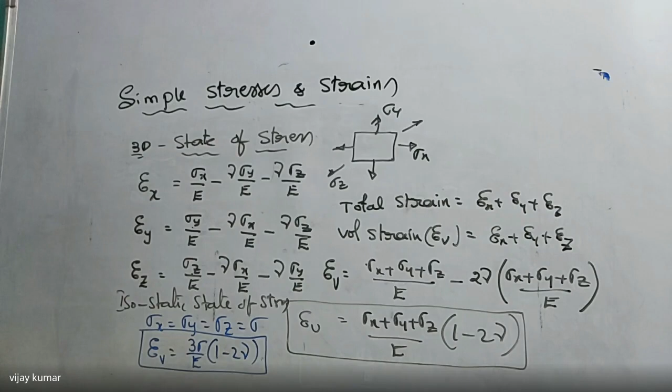Now I want to give one more question on this one. They will ask like this: if you apply any type of force on the component, and the component does not undergo any expansion, does not undergo any contraction, then what is its Poisson ratio? Can you give the answer for this? What I am saying here, I know the value.

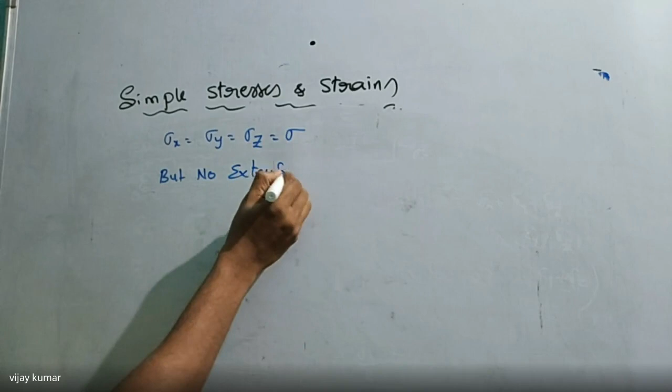So here sigma x equal to sigma y equal to sigma z equal to sigma, you got it, but no extension or contraction. Then what is the value of Poisson ratio in the material? Infinity? No, that is not infinity. See this one. What is the formula?

We know that volumetric strain is equal to change in volume by original volume. It is also equal to 3 sigma by E into 1 minus 2 nu. If there is no expansion, if there is no contraction, then what is the change in volume? No contraction, no expansion, change in volume becomes zero. So this value becomes zero. Then I am writing 3 sigma by E into 1 minus 2 nu is equal to zero. You got it? Right.

Then I am writing 1 minus 2 nu is equal to 0. Then 1 is equal to 2 nu. Then nu is equal to 1 by 2, equal to 0.5. So the Poisson ratio varies from 0 to 0.5. There are different types of materials we are using. Negative Poisson ratio is also there in some materials, but we are not going to use such type of material in most of the engineering practical cases.

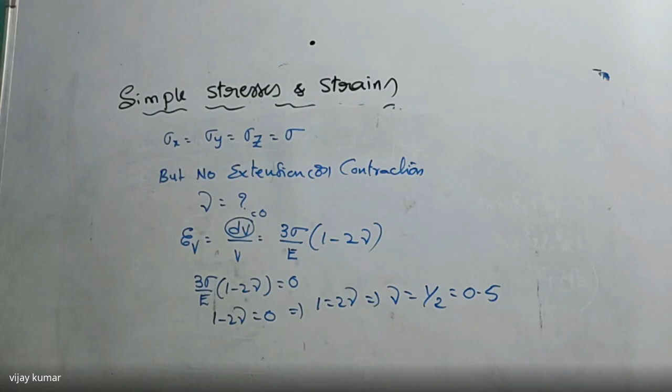But here the Poisson ratio varies from 0 to 0.5. There are different types of materials which are having different Poisson ratios. I'll give it to you later in solving the problems, which material has how much Poisson ratio. Okay, don't bother about those things now.

So here two conditions are over. One is when the component is subject to isostatic state of stress, and the second one is when this component does not undergo any extension or any contraction by the application of any tension or compression in all directions. Then this Poisson ratio becomes 0.5. There are some materials having some values of Poisson ratio. I'll give it to you later. Don't bother about those things.

So after this one is clear: what is the relation between stress and strain in one dimensional, two dimensional, three dimensional according to Hooke's law. All of it clear? Anybody have doubts on this one? Please ask me. So three things are clear: what is the definition of stress, what is the definition of strain, and how to write the relation between the stress and the strain. All of it clear? Anybody have doubts? Please ask me now.

Right. So now I'm going to explain the next one. That is nothing but how to apply Hooke's law. So what is the application of Hooke's law here? So, application of Hooke's law.

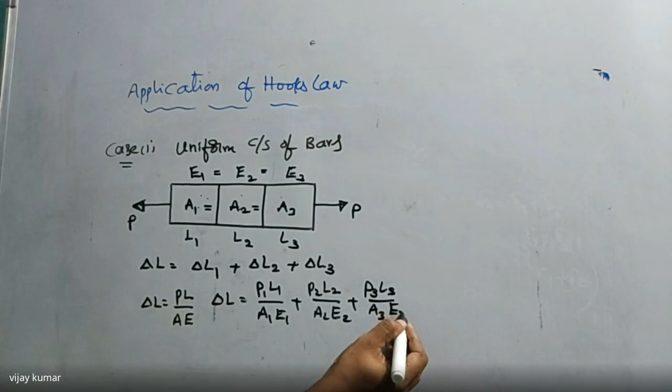So in this equation, what is the force on each part? Force on each part is same, so P is common. Uniform cross section means the A value is also same, so P by A is same. So I'm writing L1 by E1 plus L2 by E2 plus L3 by E3. If all are made of same material, then E1, E2, E3 are also same. Then I'm writing P by AE into L1 plus L2 plus L3.

So this is the value of total elongation of the bar when the bar is made of different material or same material. We can take any condition and apply it like this, then we can find the total elongation of the bar according to Hooke's law. For uniform cross section, there is no change in cross section of the bar. All of you got it? Right. This formula we can directly apply to find the total expansion of the bar.

I will give it to you after completion of the theory. I will give the problems which are given in GATE examination on this model. Okay, don't bother about this.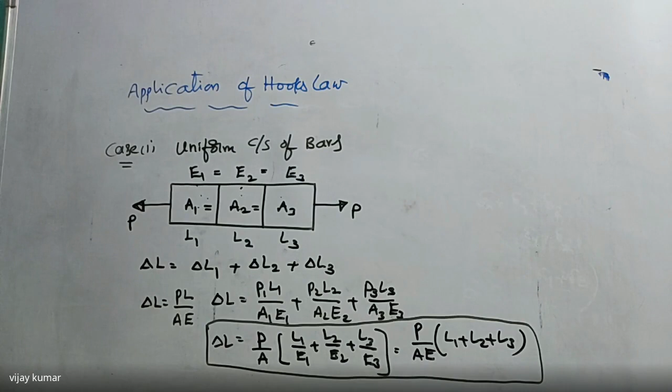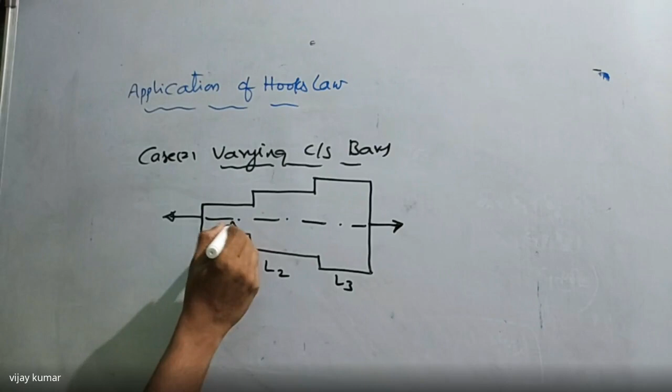So second one, I'm going to explain varying cross section of the bars. Case number 2: varying cross section bars. Varying cross section bars means area is different. So I'm taking here this bar, which is subject to a tensile force or compressive force. This is the axis of the bar. This one is L1, this one is L2, this one is L3, these are A1, A2, A3, and E1, E2, E3.

Now I can use the same formula, total expansion is equal to delta L1 plus delta L2 plus delta L3: P1 L1 by A1 E1 plus P2 L2 divided by A2 E2 plus P3 L3 by A3 E3. So which values are common here? Area is not same, area varies. Young's modulus is same when the material is same, and P is same on all parts. So P by E is common when all are made of same material, and we write L1 by A1 plus L2 by A2 plus L3 by A3.

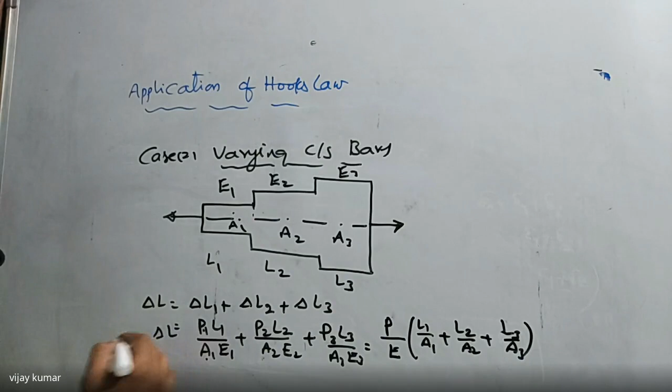So this is the formula we can use to calculate the total expansion of the bar having varying cross section along its length according to Hooke's law. I'll give the problems, don't worry. I will give problems on uniform cross section and varying cross sections, which are given in GATE and other competitive exams. If you solve those problems, you get the confidence to solve this type of problems. So this is case number 2, how to apply Hooke's law.

And case number 3 is very, very important, so we should take care about that. That is nothing but extension due to self-weight.

So extension due to self-weight. Now listen carefully, how to find extension due to self-weight? Actually, extension always occurs due to application of external force. But what I am saying here is extension due to self-weight, meaning I'm not applying any external force.

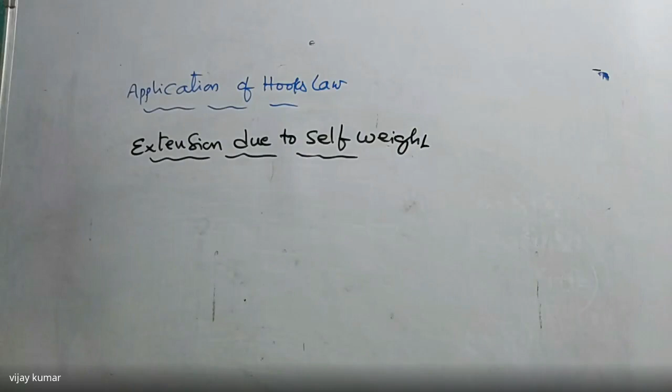Now see this bar I am taking. This is a vertical cantilever beam which is fixed at top and free at the bottom. This is the length of the bar, L, and this is the area of cross section A at the bottom. It is a uniform cross section of the bar from x equal to 0 to x equal to L along the length of the bar.

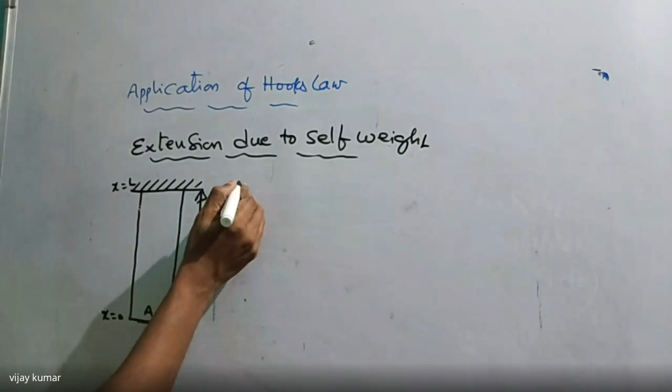What I am saying here is extension due to self weight. We know the formula: delta L is equal to PL by AE. I'm going to apply the same formula. But this formula can be applied for the case when the component is subject to external force. Listen carefully, that formula is always applicable only when the component is subject to external force. Got it?

But here, there is no external force. So how to find the extension of the bar due to internal forces? Here, there is no external force, so I am writing external force is zero. Now tell me, if the external force is zero, what is the stress at the bottom? Stress is also zero at the bottom. But what is the stress here now? If there is no external force, it is also zero. But here, due to the self weight...

I'm going to give the explanation. Listen carefully. I am taking a small element on this bar, which is at a height of x from the bottom, and the thickness of this element is dx. Now, can you give the answer: how much force is acting on the small elemental area?

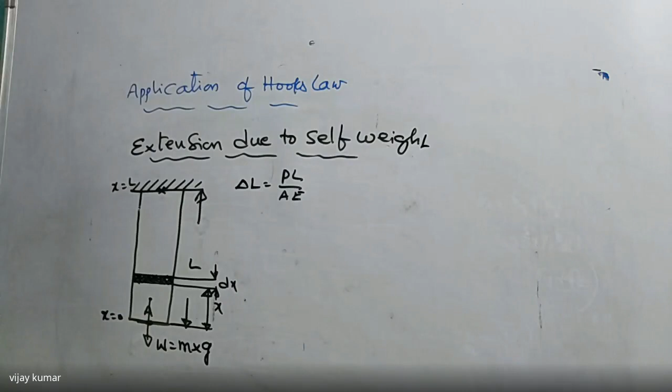Now, if you take another element here, will the force increase or not? If you take another element here, on this element, force is less. It keeps increasing, increasing, increasing. When the force increases, what is the value of stress here? Stress is always equal to force by area, but area is always uniform, that is constant. So sigma is equal to P by A. When P goes on increasing and area is constant, the value of stress goes on increasing.

So now tell me, due to extension from self weight, at the bottom there is no force, but above the bottom there must be a force due to its self weight. If you take point after point going up, the force gradually increases, but the area of cross section is uniform and constant. So when force increases and area is constant, stress also increases. So stress is maximum here at the top and stress is zero here at the bottom. Got my point? Due to its self weight, I am saying this.

If you don't consider self weight and don't consider external force, stress at the bottom and stress at the top are both zero. Got my point? So at the bottom and at the top, stress is zero if you don't consider the external force or the self weight of the material. Now the next point: if you consider the self weight only, and not the external force, I am writing here.

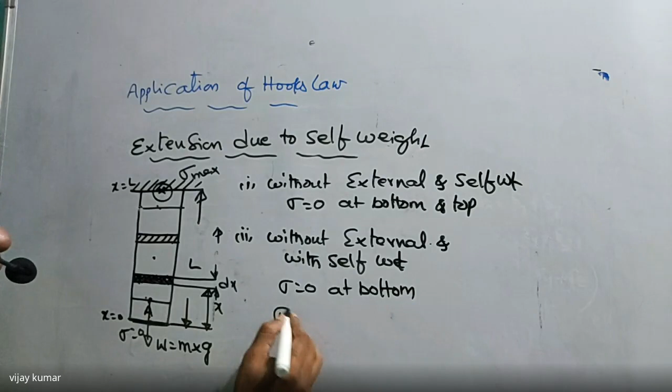Now tell me, when the sigma is maximum, where the stress is maximum, at that point the component goes on fail. Is it right or not? So we are going to design the component without failure. So where the stress is maximum, I want to increase the strength of that material at that point. So how to increase strength?

If you want to increase the strength, we have to add the material here. If you add the material here, then automatically the strength of this beam will also increase. So I can design like this. I can increase the material like this. So this material will add it here. Got my point or not? I'll give you more explanation later in bending stress and beams.

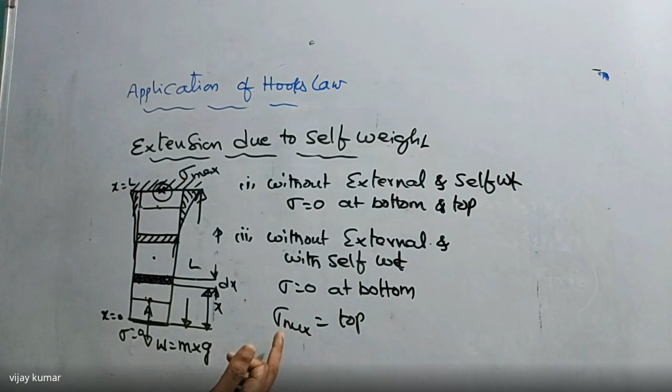So here, in the second case, without external force and with self weight, sigma is zero at the bottom, sigma is maximum at the top. But in this case, how to find the extension now? Due to self weight, we are not considering any external force.

Now tell me here, what is the extension of this element? Extension of the element is nothing but delta L. Delta L is equal to PL by AE. What is P here? P is nothing but weight of the bottom portion. So P is also equal to weight. Weight is also equal to M into G.

We know that weight is nothing but density into volume into G. I am writing rho into G is nothing but specific weight. All of you know it. Volume is nothing but area into length. What is this area? A. And what is length of the element? Dx divided by... that is the weight of this bottom portion.

That is delta L is equal to weight divided by A. So here a length is also there, so length is nothing but x. This is the length of the bottom. So A, both are cancelled. I got W into X into dx divided by E here.

This is delta, that is change in extension, change in length of the small elemental area. But I want to find the change in length of this total bar now. Total bar means the limits are there, that x equal to 0 to x equal to L here. So I'm going to integrate from x equal to 0 to x equal to L here. I'm writing so specific weight by E into x square divided by 2, up to the limits 0 to L.

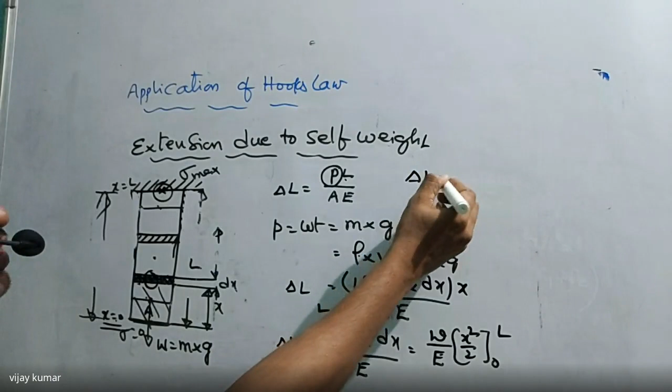Then what is the value we get it now? That is delta L is equal to W into L square divided by 2 times of E, is the value of total expansion of the bar due to its self weight. Are you got it? So do you have any doubt? Please ask me immediately.

The formula is very important, but the explanation is not important for you. You have to remember the formula. So if you remember the formula, we can attempt each and every question in GATE examination, totally formula based. But we have to learn the concept also. So it is not possible to remember all the formula in GATE in our subject, but we have to remember the concept also. Okay, all right.

So this is the formula in specific weight. I want to find the total weight. So specific weight is nothing but weight by volume.

Weight by volume. So what is the volume here now? The volume weight is nothing but W. Volume is nothing but area into length, for total volume I'm writing.

So here I'm going to substitute delta L is equal to W divided by A into L into L square divided by 2E. L both are cancelled. Then you can write delta L is equal to WL divided by 2AE, which is the value of expansion of the bar due to self weight in terms of total weight.

This is in terms of specific weight. So take care about the options here. In GATE examination, they will give 4 options. Check the 4 options. They have given the answer in specific weight or total weight. Check those options, then we can identify it.

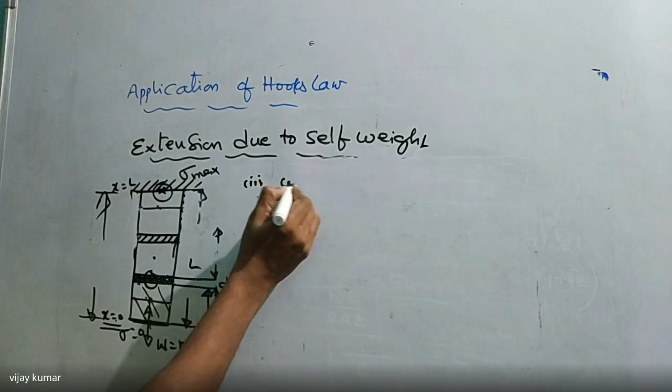Now if you take with external force, what happened? I'm writing here, case number third case here: with external force and self weight.

Now anybody tell me, with external force with self weight, what is the total expansion here? We can say easily that is expansion due to self weight plus expansion due to external force. Due to self weight we know that is WL by 2AE.

What is the external force here? External force is P, I am writing here. So I am writing due to external force PL by AE. So here I am taking one assumption. This is the total expansion of the bar with external force and the internal force also, that is nothing but self weight.

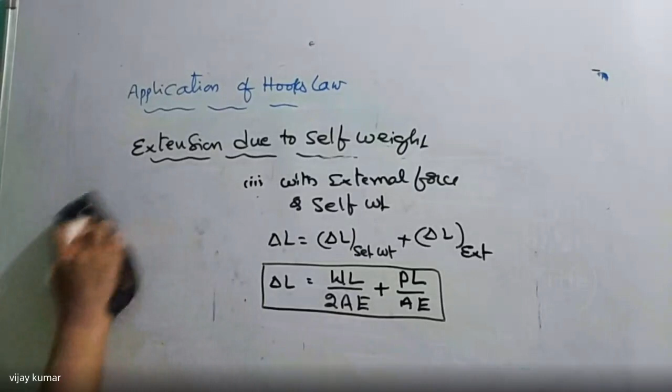Now tell me, is there any possibility to equate the self weight and external force? Can you apply the same amount of external force which is equal to self weight? Is it possible? Yes, it is possible. We can apply the same amount of external force which is equal to its self weight.

So I am writing here, when W is equal to P, then I am writing total delta L is equal to WL divided by 2 times of AE plus WL divided by AE. Which one is common here? That is WL divided by AE is common, into 1 by 2 plus 1 we are getting.

Then I am writing here WL by AE into 3 by 2. So this is the value of total expansion of the bar due to its self weight along with external force, when the external force is equal to internal force. That is the condition I am writing here now. So when they both are not equal, we can apply this formula. When both are equal, apply this formula, that is 3 by 2 times of WL by AE.

So this is the expansion due to self weight. So three cases is over. How to apply the Hooke's law: the first one is when the bars are having uniform cross section. Second one is bars having varying cross section. And third one is bars due to its self weight.